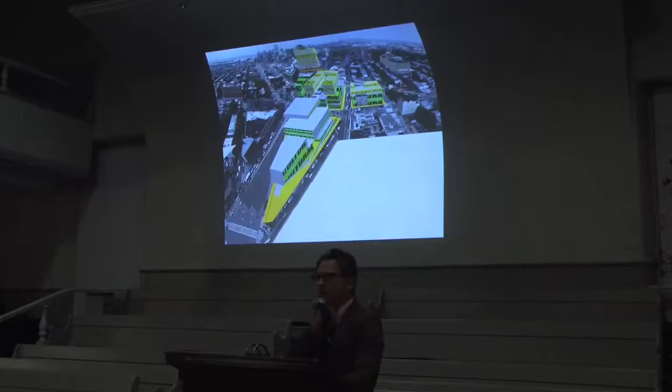This is a project that we did with Rem Koolhaas. You may have heard of him from OMA. It's the BAM Master Plan, currently underway out in Brooklyn.

We've also worked in theater. This is a project called Jet Lag that was produced in 2000. This won an Off-Broadway award, an Obie, which is kind of exciting since we wrote, directed, and built the sets. This has to do with the notion of being lost in our modern world.

It's two true stories put on stage: one about Donald Crowhurst, who you may have heard of—I think there was a movie about him last year—who feigned his sailing records as he was going around the world and was actually lost at sea, though the BBC thought he had won this major race. The other is about a woman who died after having flown 167 round trips from Amsterdam to New York consecutively to evade the law, and her grandson.

This is an installation we did at the Cartier Foundation in Paris. We also work in major installations. This is a show we did with Rolf Fehlbaum, founder of Vitra, the furniture company, who has a collection of toy robots. So what we made is a dystopic environment that was actually kind of fun, and we surveilled all of the toy robots on their way to and from their desks, displaying those on monitors around the space.

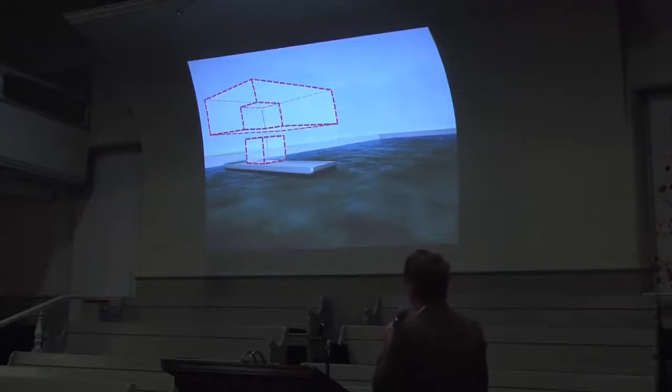We were challenged by the site, because sites with a view are usually the site you really want. But in fact, we thought the view is actually a distraction from the art. So what can we do to the view to turn it into art itself? We thought maybe we can blur the view, or pixelate it, frame and edit the view, or we could use the water in a particular way. One of our initial thoughts was to make part of the building dislodge, go into a barge, and float around Boston. That would have been fun, but that was what we call in architecture 'VE'd' - value engineered out of the project.

What's wonderful about the site, aside from the water, is the boardwalk, which was mandated by the city of Boston to surround all of Boston's waterways, and our site has two edges made up of the boardwalk. We thought, that's a wonderfully democratic surface - wouldn't it be fun to talk about the democratic building by using that surface to make the building? So we pulled the wood up into the building and made all of the primary program spaces with the wood. There's a grandstand formed out of this, which turns into a theater, and then makes a little platform for the art hall above.

And we also wanted to bring the walkway right through the building, so joggers and rollerbladers, if they could rollerblade on the boardwalk without getting their wheels caught, could go right in through the building and see what was going on. So we considered it a very public building.

And this is not really a program aspiration that had been brought to us. It's something that we brought to the project. We felt very convinced and compelled that every institution needs to give back to the city in a way that is unexpected and exciting. The art gallery sits on top. It's skylit, toplit, and that's what it looks like from the harbor.

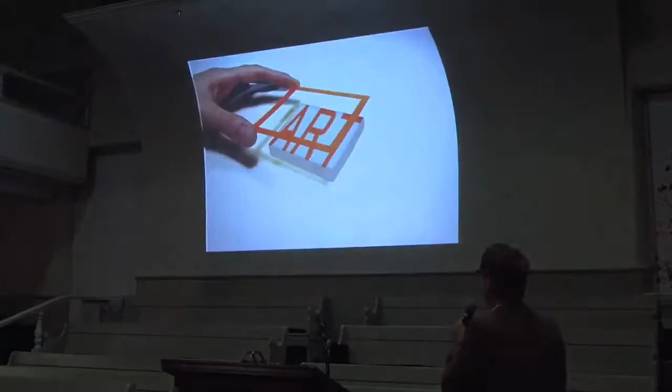This is a little museum that we're very proud of, a competition we're very proud of, that we did for an industrialist in Neuhaus, Austria. That is his little town, very, very cute. That is his art, very, very uncute. The Austrians were known as the inventors of sort of body art, and we sought to magnify the distinction between the beautiful surroundings and the graphic nature of much of the art inside.

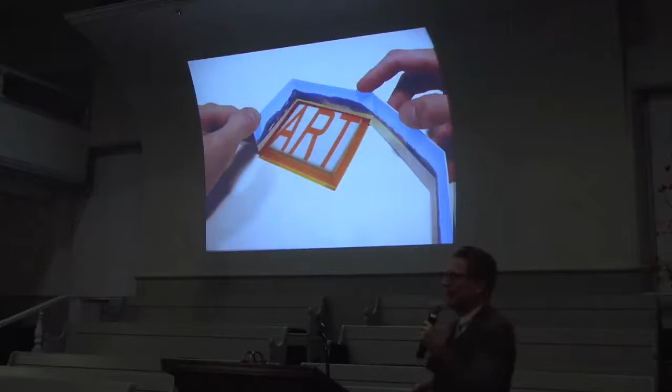Rather than have the circulation system where you go from gallery to gallery be on the inside, we had it on the outside, where you could see the view every time you leave a gallery. So the pattern is: you're circulating into galleries and then returning to the view every time you leave a gallery.

On top of that, we wanted to tip the gallery into the ground. This is the entire sequence of views from that circulation hall around the entire gallery, and there's a moment where you dip down into the earth and see the earth sectioned around you. The gallery that has the most graphic body art is in fact down at this lowest point.

The action is most intense there. I mean, okay, to hit you over the head with it: the sectioning of the animal equals the sectioning of the earth.

The funniest part of this is that is the industrialist's house—I guess some people would call it a castle. So we used the building to frame both the hamlet and the castle of the museum owners, the residence of the museum owner there.

Quickly, I'm not going to tell you what all this is, it's sort of self-explanatory, a very simple plan. There's this sectioned view; it's in a cornfield, and we just left the field to be mowed.

Because it's tipped into the ground, it creates many strange offsets, vertically, sectional offsets. Even though it's a flat building, it has quite a few moments of overlook and underlook, as the case is.

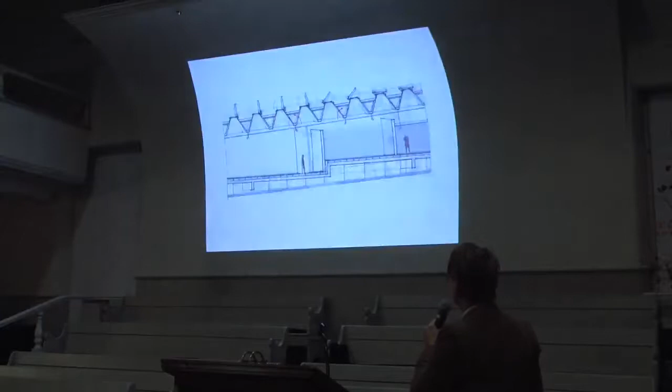This is a hole that goes from the roof down to underneath, so it can rain through the building. This is something we've wanted to do in a lot of projects—you'll see it one of these days.

The top of the building is actually occupiable and is covered by a field, and it's also covered by a field of skylights. The skylights are on sensors, so they turn to let the sun in, and they can lock down and shut out the sun down below. That's sort of what it looks like within the field—very demure in a way—and that is the total picture looking back to the owner's house.

Now I'm showing you this because it's a K through 12 school, and I thought you might need to see a little bit of thought about the K through 12 school. Okay, I've been talking for 20 minutes.

Now, I know you guys are terribly progressive here, and I've been very impressed with how progressive you are. However, when you talk to people in Denmark, they really blow you away with their kind of Earth Mother tendencies. So we were invited to do this competition, in a new part of Copenhagen that's being developed on the water.

Among the things the leaders of the school told us we needed to do was accommodate all of these activities in our school. So there should be an aquarium, you should be able to scuba dive, you should be able to whitewater raft in the school.

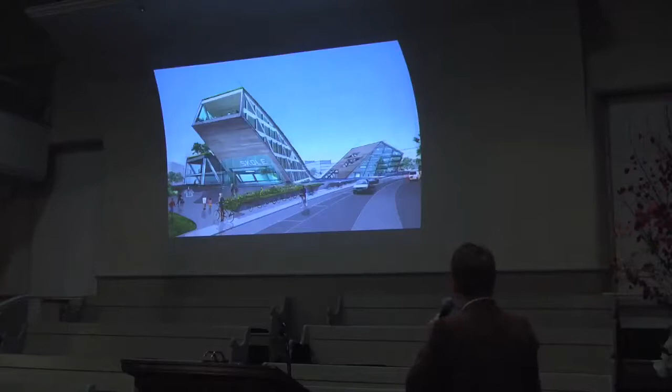One of the nice moments of synchronicity was that at high tide, the real harbor would be just about the height of the swimming pool that would exist at the back of the building. And of course, because the building is gently sloped, the slope is entirely terraced and plantable, so people can use it.

They also said they want the kids to be able to chop down trees with axes and carve stools out of them, so they could carry them from place to place. You guys should think about your curriculum based on this, and now we have some experience with this too. This is in the little hump zone.

Here's the swimming pool above you, and in the swimming pool is this dive tank, so swimming right past your friends eating lunch. Here is the gymnasium. I always have to say, I just don't know why he's so sad, because look at the environment here, it's so cool.

The other thing we did is use the harbor to actually engage itself in the academics. So we made a tidal beam, a water beam. This is the actual harbor out here, and water flows through the beam to the basin here, so water will disappear depending on the tide. I'm not sure that those kinds of fish would be there, but you could at least do a chemistry experiment on the water to see how dirty it is.

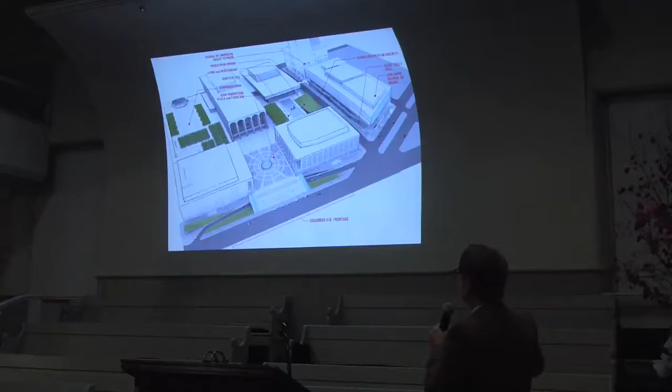So I'm saying that in a way to give myself space to take another professional's work out. It was actually very challenging to work under the watchful eyes of the preservationists here. It was rather challenging, but we've managed to succeed. This Dan Kiley landscape will be restored to its original glory, or better than its original glory.

Other parts of our contribution include a renovation of the street. We took out a big old bridge that used to be here, the 65th Street overpass. We've renovated much of the Juilliard School on the inside, added a large portion of the school here, and renovated Alice Tully Hall here.

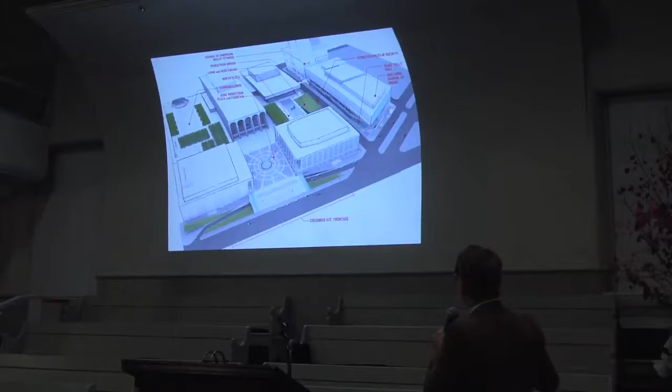We're continuing to do work on the inside, contributing a piece to the new Koch Theater, formerly the State Theater. We were astounded to be granted this amazing commission. Part of it was that we had done a lot of work in the public realm with art, and a wonderful benefactor, Rebecca Robertson, who now runs the Park Avenue Armory, had faith that we could handle this crazy set of people. There are 13 constituents, all these different houses, and somehow we've managed to make it happen.

Here on Columbus, we've remade the steps. You probably walked up them. They're missing one critical element: there is LED signage which will be embedded in each riser, and these will be informational and provide ambient light.

We've designed new canopies, glass canopies. They're supported on a single column, very dramatic. They go all the way from each of these buildings to Columbus. Those are partly in—they'll open very shortly. That's the new fountain.

You may think it looks pretty much the same, but it's very different. The ring around it that floats replaces what was a very heavy bench that went all the way to the ground. We've lowered the pool part of the fountain and raised this up, all in an effort to make things lighter, more transparent—that was one of our big goals at Lincoln Center—and more playful. There's a program in the fountain that makes it do all kinds of crazy dances. It will never be Las Vegas, so don't worry, it's not the Bellagio.

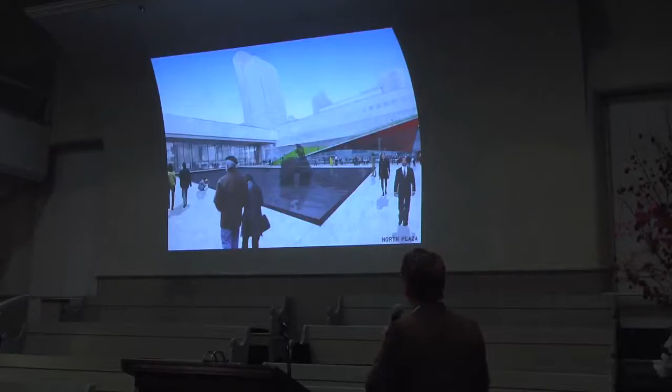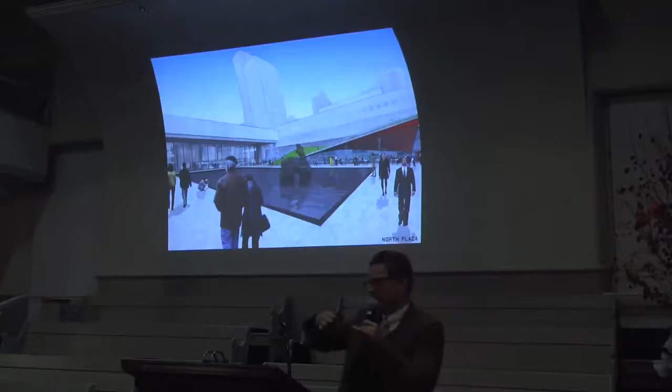There's a new reflecting pool here with a drip edge, and this is a new restaurant that will be opening in a year. We have a new chef I can't name—it's very exciting. There's also a lawn on top of this, and that lawn will serve as sort of the campus green for the Juilliard School.

This is a hyperbolic paraboloid, simply a form that's been twisted like this. It looks very complex, but it's quite simple. This is from the green of the lawn, and that's the new bosque over there—it's complete, this is it. Again, the detailing is all intended to lighten things up, to make them float. It's sort of a magic carpet with trees.

Plenum space is a space beneath the slab, between the slab and the drop ceiling. We were able to put 2 brand new studios above their existing studios, floating them on 3 steel beams that were brought in on big cranes. The windows were taken out and the beams were put in, so it's sort of like nesting dolls.

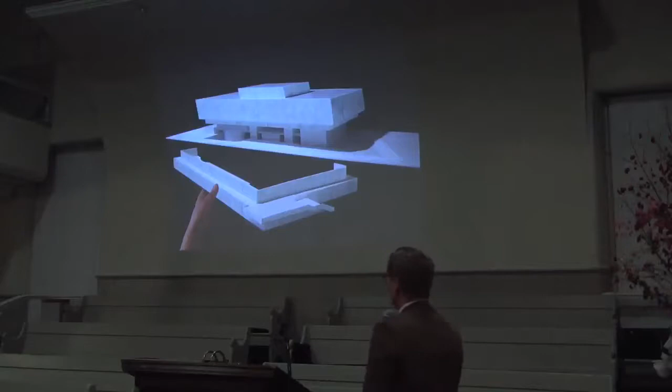The Juilliard School is Pietro Belluschi's probably best known building in America. I'm not even sure how many he did, but it's definitely one of the best examples of brutalism in America, and one of the few in New York City. So we were excited to work on the building and add on to it, but we were also a little scared of it, because we knew it exerted so much psychological and formal weight that we weren't quite sure what to do.

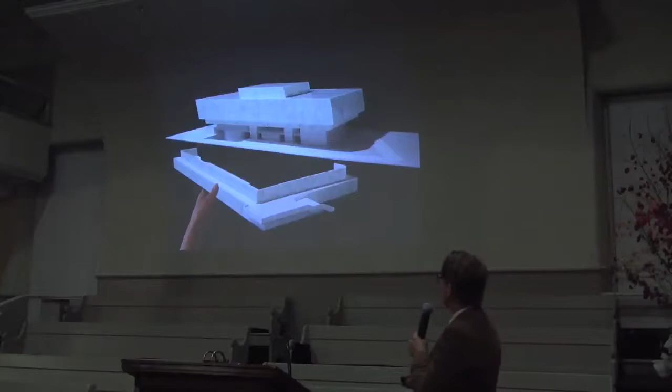So what we thought to do was make it lighter, but not impact the overall expression of the building. All we did is take the bottom away, which had been a big heavy stone base.

This gave the building a whole new image on Broadway. For the first time, Lincoln Center would have a diagonal, and that was really exciting. What we did is we just chopped the facade at the angle of Broadway and let that facade act as almost a guillotine that sliced open the program of Juilliard.

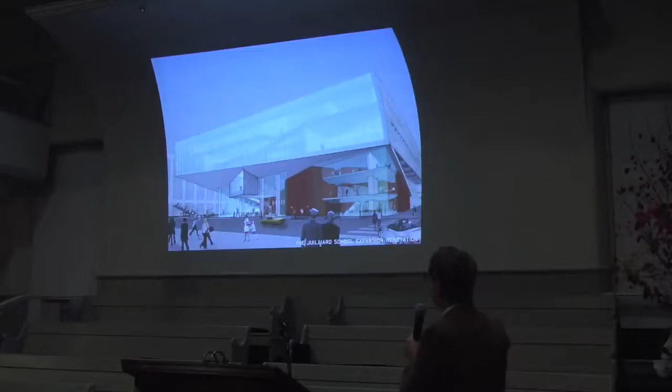Juilliard had never exposed its program to the outside world. You could not see in, and the kids could barely see out. The studios were double height, the windows were up at the 2nd floor, you could never see out. So we placed a lot of program up at the face, and we made new social spaces at the face for the very first time.

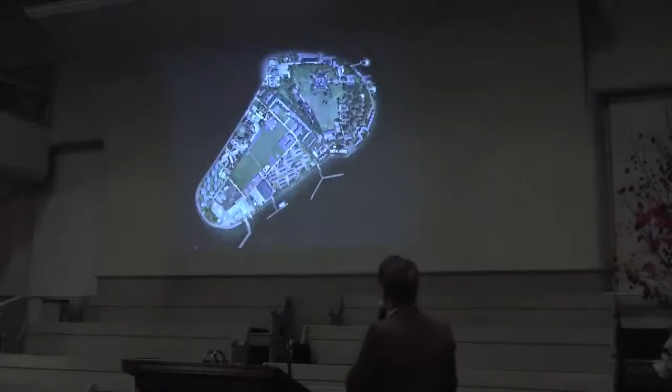Okay, let's see. Well, we've done a little thing for Governor's Island. Let's see, what am I missing here? I want to get to talk about the project a little bit that we're going to be doing here. So I'm going to quickly go through these, or just maybe two more projects here.

Governor's Island we won as a competition with West 8, and our premise was Governor's Island is this amazing place, but it's actually an artificial place. It was made mostly by the refuse from the making of the subways. So while a good portion is historic and a real island, most of it is not. And so our idea was to make an artificial nature that is somehow the equivalent of Manhattan's artificial artifice, if that makes any sense.

These are just some early sketches we did with West 8. This will be developed over the next few years. We've just finished the master plan. There's essentially a mountain range in the middle, and the mountain range transforms to become something else on the edge, which I'll talk about in a second. This is our primary contribution to the competition entry. It's not going to be quite like that any longer, but the mountain range does still exist.

The Army Corps of Engineers is very controlling of the waterways in New York. Well, I'll say that—we learned that. So one of the wonderful things that West 8 did is they've invented a wood bicycle, and it will be free of charge on the island, and it will be hard to take to the city because everyone will know you've stolen it from Governor's Island. So there's a little bit of social regulation there.

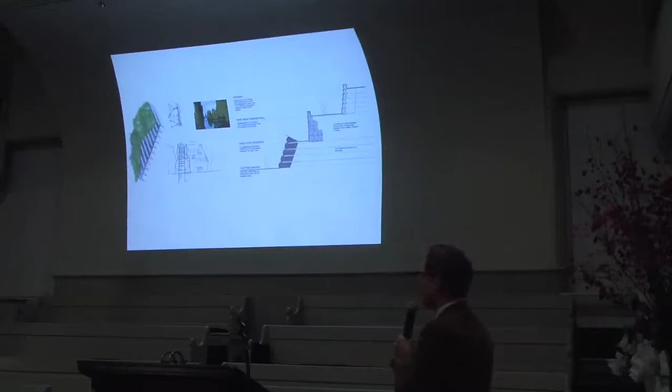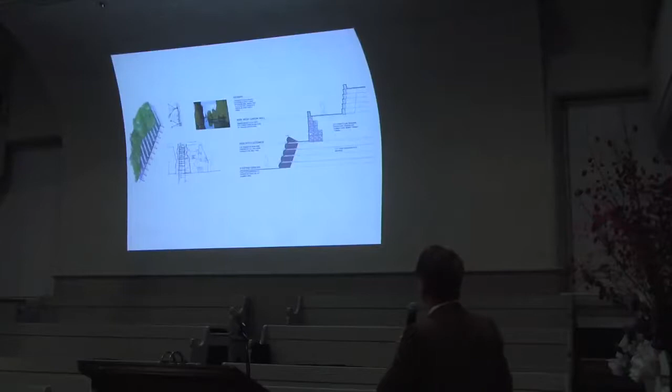Here is the mountain range that you can ride your free bike between. The mountain range will be made with the detritus from the demolition. Most of the old buildings that were used to house the Army and the Coast Guard have been taken down, and the material has been saved, and it will be piled up and battened on the sides to create these.

Now, you probably know that oysters used to grow in the Hudson. They were so plentiful that they served them at every corner bar, free of charge, like peanuts. After the industrial development up the river, the oysters completely died out. There were no more oyster beds as of 20 years ago. However, since the giant cleanup that happened up there—I forget who did it—amazingly the river has gotten clean enough not only for oysters to grow, but also for oysters to eat. Almost, in a few years, you'll be able to eat the oysters.

And so we thought, as part of our contribution to the competition, make a set of bubbles that kind of transform the mountain range into other objects that engage the river in various ways, and engage the ecology of the river in various ways. So we have one bubble that laps over the solid ground and goes into the water. There's a tunnel system that goes under the water.

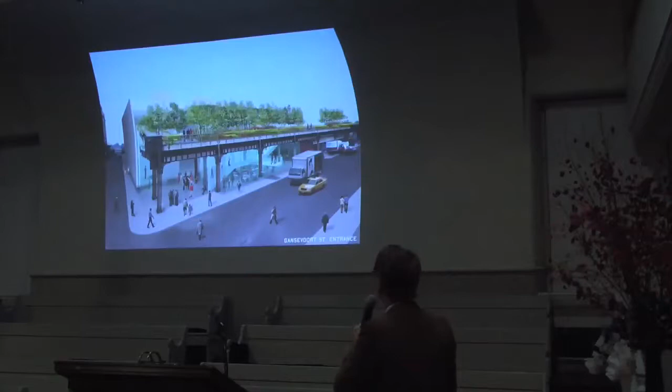These were our competition drawings. This is Gansevoort at the very end. This plays into the project we're going to be doing here, and I'll get into that in a second.

This is some of the planting. We worked with a wonderful horticulturist, Piet Oudolf from Holland, who very, very carefully selected all of the plantings to either be indigenous to the New York area or to thrive in this environment. The hope is that over the years, not much more than routine maintenance will be needed, that the plants will more or less live on their own, and we're very excited about that.

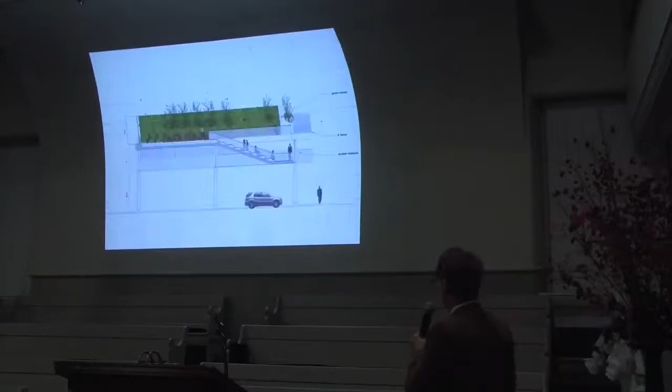We were interested in the special features of the High Line, such as the moment over 10th Avenue where it widened out. These guys, the original builders, were sort of being lazy and cheap and just decided to span the shortest distance, but it made a wonderful plaza hanging out over 10th Avenue. So we decided to detourn the plaza, to take it over, put a grandstand in, cut holes in the edge, in the end, and let you look down over 10th Avenue.

And so you've probably seen it. These are the completed pictures. I won't dwell on them. We all know what's happening at the Standard now. You can see the Statue of Liberty, which I didn't really realize.

And it's a magical place. I mean, and it's not simply because we worked on it. It's just great, I mean, everybody's probably in this room has been there, but we're very pleased with how it's turned out. That's 10th Avenue Square. Here's the sort of overlook.

There's a water feature which is being finished right now. Mind the mess that's there right now. There were some plumbing problems. The lighting is unbelievable. We worked with the Parks Department.

We can't believe they let us do what we did using glass and materials that seem fragile. Glass is not actually terribly fragile, and it's certainly not when people have respect for it. And one of the things that this project has done, more than any project I've ever witnessed in New York City, is make people have respect for public space.

It's been astounding, and also what it's done to speed is astounding. I feel like this is an unfurled piazza from some town in Italy, where people have finally learned how to make a passeggiata. They can slow down, take it easy, stroll. It's social, it's cruisy, exactly all those things that we had hoped, and it's fun.

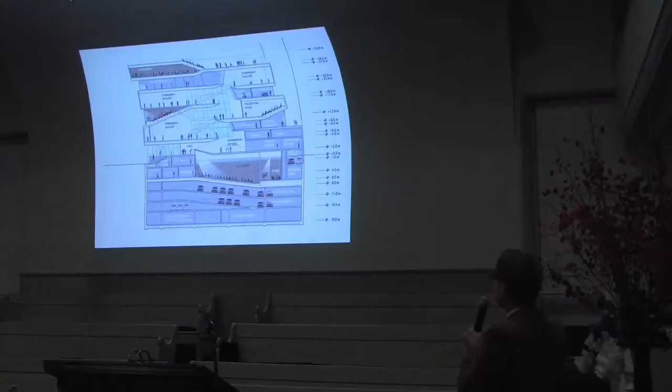And then here's the restaurant, and here's what will become the disco. They said piano bar, but they meant disco in the brief. I don't know, we learned that after we went down there to present.

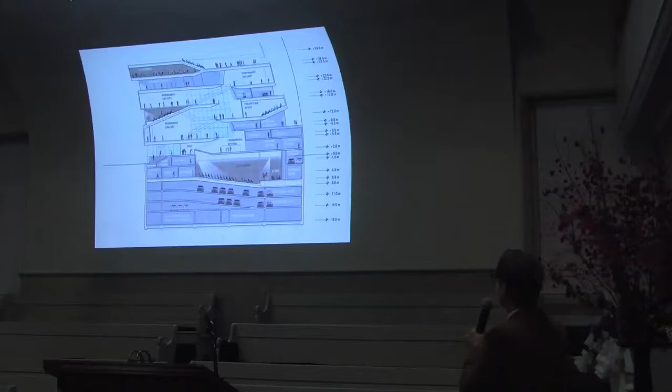And here's the auditorium, they'll present all kinds of different types of pieces there, and rooftop cinema up here. One of Brazil's most famous favelas is right here, only 2 blocks away, which is pretty interesting.

I don't know if you heard, there was a police helicopter shot out of the sky this weekend, and we had our crew down there working on this project. Anyway, it's a little bit of a scary place that will inevitably be made a lot safer with the Olympics.

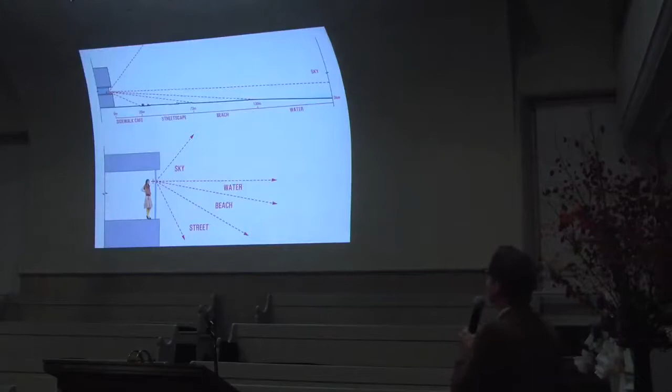Rooftop cinema, we played with view very much like the ICA, a sort of different concept of view. Here, what we tried to do was edit the view out according to how you move through the building, so here's the view compressed of all of Copacabana.

That's Sugarloaf down there, and so here's the entire beach. We thought, well, why don't we deliver portions of the view to you as you go through the gallery? So we split up the view, just like you see here. We edited out many parts of the view, and we were delivering the view through a perforated screen on the outside of the galleries.

Like this. When you're in the restaurant and the disco and the other spaces, you'll see perfectly well out. But when you're in the galleries, we wanted to make you conscious of the fact that you're in a contemplative space, and not simply, as I used for the ICA, a pornographic space.

So here's the technique. This is going to be cast in a material called Ductal, which is like concrete, but much stronger than concrete and much lighter than concrete. You see how the angles change, the perforation angles change, so that when you're close by the screen, you can either see directly through, or your view is actually sort of blocked. That's by virtue of the depth of the screen and the angles of the perforations.

Carmen Miranda is one of the Brazilian artists - she's actually Portuguese, but a Brazilian artist - whose collection will be housed here. There is a Carmen Miranda museum; it will now be here. She was only 5'2", so all of her shoes have, you know, 6 to 8 inch rises.

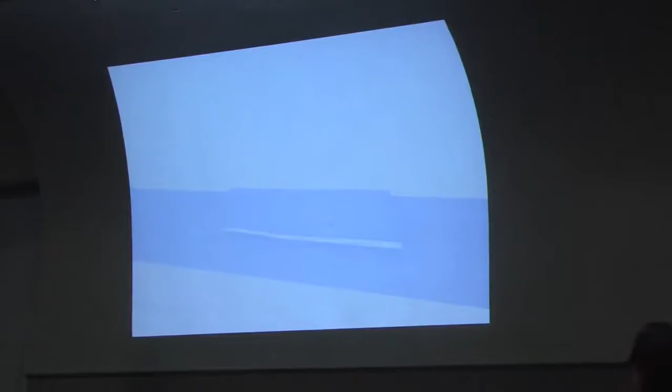Sheared, lifted, pulled, woven, making the spaces of the gallery, and making the walkway that comes up. That's the restaurant being formed.

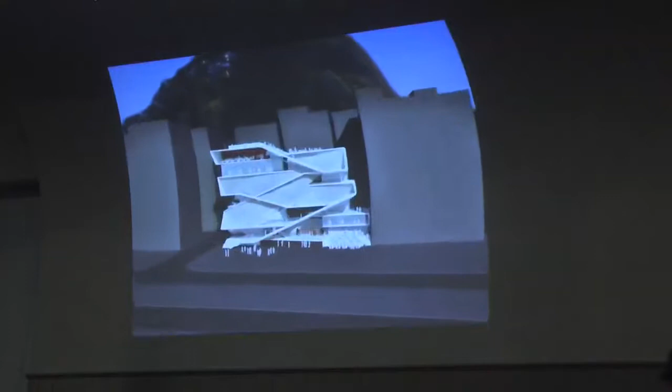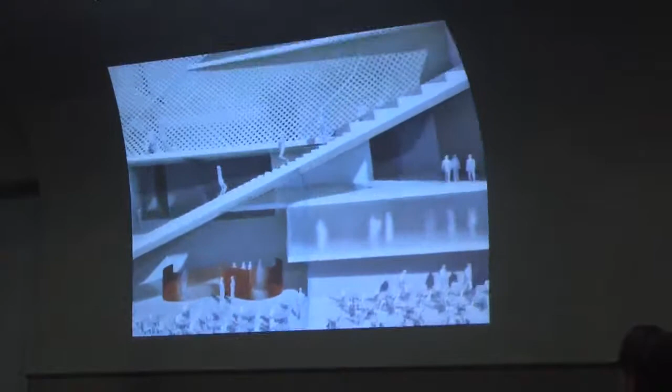You can see right down into the auditorium from the sidewalk. Again, we wanted this to be an incredibly democratic building. As you can tell, the Burle Marx, like the Boston ICA pavement, it's a surface of the people.

These are the galleries, so they flow one into the other. You can see into what had been the piano bar, which is now the disco, right from one of the galleries into the framed view.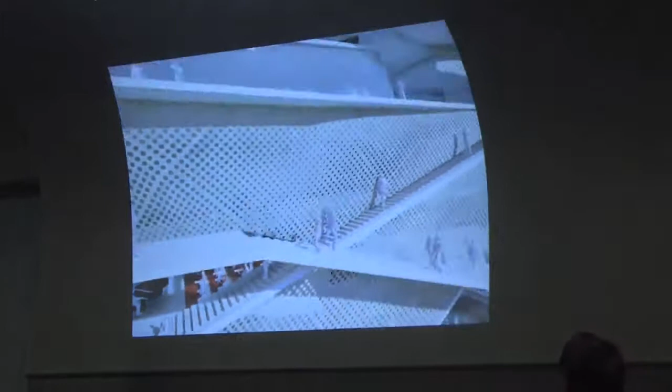No need for a gym membership when you go to this building regularly. Disco, distinct disco. Moving on up - here's the restaurant.

And then the rooftop cinema. So we're excited about that. Oh, this is sort of a coda, and then we'll finish.

Tasty landscapes, landscape, nature, our environment - things we're all interested in. We don't work like other architects who proclaim themselves to be sort of sustainable architects. We think sustainability and awareness of the environment and of nature is just something we have to have. It's not something we do and say we're doing.

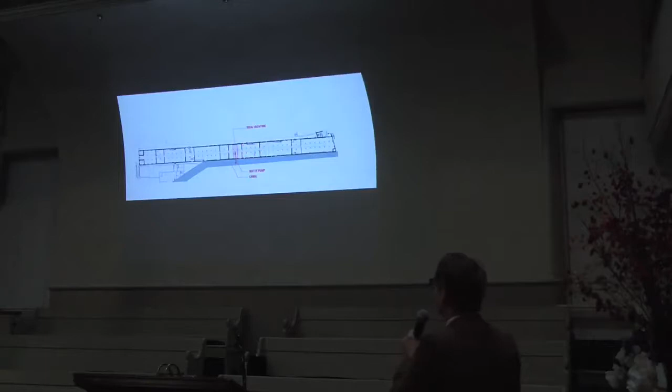So we were asked to participate in the Venice Biennale last fall, 2008, and the Biennale's primary show is housed in a quarter-mile long building called the Arsenale. This is on the eastern end of Venice. There's a canal that fronts it right here. It's a 500-year-old building. All of these different bays were given out to different architects by Aaron Betsky, the show's chief curator.

We chose the very middle bay because we wanted to do something very special. We liked it because there was a window right from the middle bay, right over the canal. And what we wanted to do was to make espresso out of the canal water.

So we contacted a water purification company - there are several in Venice, as you might imagine. There were 4, in fact, we learned. We started working with them, and they came up with this system. It's a kind of pH process, reverse osmosis thingamajig, that we were going to house in the Arsenale in a very theatrical manner.

Of course, we wanted to publicize the fact that this was canal water, so a pipe leading directly to the canal, a set of purification tanks showing a gradation of water from dirtiest to cleanest, and then the cleanest going right into the espresso machine.

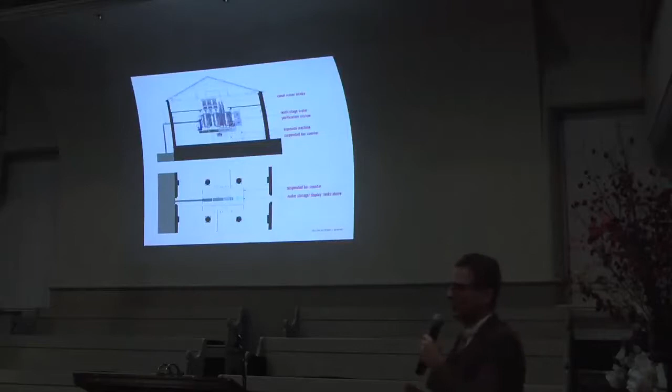We got permission to build this on the inside of the Arsenale, which is incredible. They said, okay, yes, you can, you just hang your thing on our 500-year-old columns, that's no problem. In fact, we did it, we suspended this on the 500-year-old columns, all on cables, nothing touching the ground.

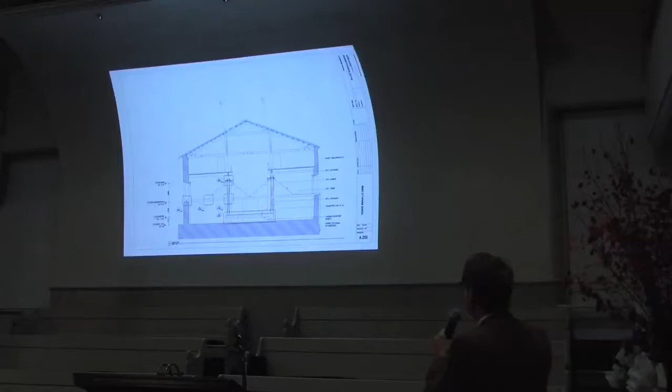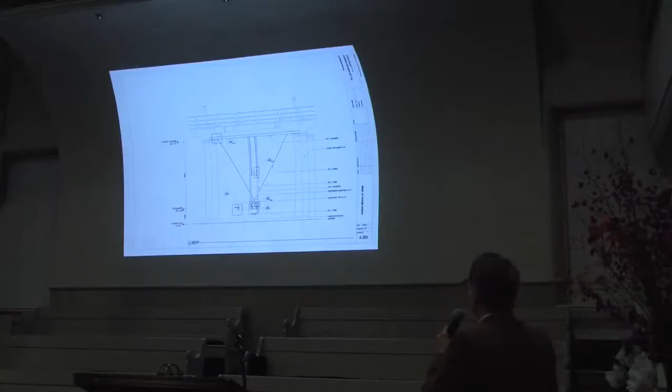There's the espresso bar, here's the pipe. These are our working drawings. This was going into manufacture about 2 months before, just a little over a year ago, and that was actually how it was going to look in the end. A little less theatrical, but still quite compelling.

By the way, there's a sludge remover that comes once a day, and they wheel the sludge out, which we thought would be a really fun thing, to take sludge through all the other exhibits of our friends and competitors, I guess. Anyway, so we didn't make it. I guess you could tell that was the upshot.

We were told just before we went into fabrication by the mayor of Venice that if we fed anybody an espresso with canal water, we would all be thrown in jail. We panicked, so we stopped and made a different video project instead, which was also well received, but nothing like this. Then I thought, geez, that might have been really fun. Don't they still take the prisoners over the Bridge of Sighs? That would have been really fun. Anyway, we chickened out and didn't.

Okay, so on to the program here. I think I've done pretty well, it's been just over an hour. What we're thinking to do is we're sort of using this project here at Friends Seminary to intersect a lot of my personal interests, my firm's experience and interests, some of our connections to institutions around, Jesse's connections, and also a project which I can bring exposure to, which is the High Line.